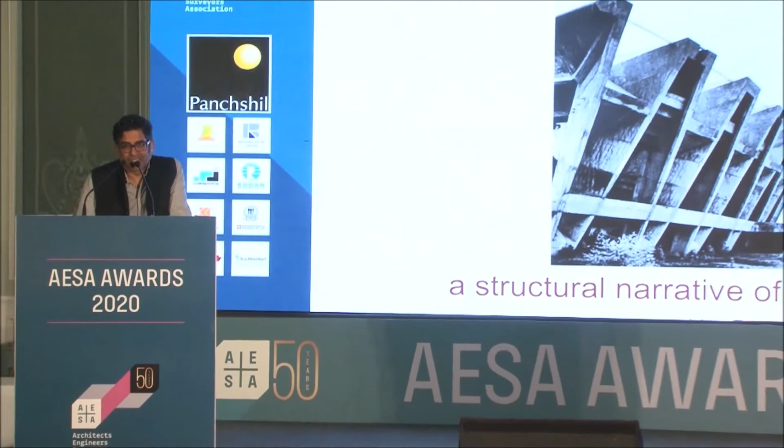And we are focusing on the first 3 decades of his practice, the 60s, the 70s, and the 80s, when there was a lot of innovation in India in architecture and engineering, where the history of the script of modernity for Indian architecture was written. And it was written by my father, Mahendra Raj, along with all the architects. They all worked together and created a portfolio of works which I think should be the envy of the world, but it's not there right now. And that's why we choose to show this again and again.

We'll discuss only a few of his projects out of the 250 to choose from, because they all exemplify the idea of structure and the way it enhances, implicates architecture in ways that it could not have if the engineer in focus would not have been there.

And the underlying narrative for us is this transnational exposure that they all went through. Mr. Raj, Correa, Doshi, Kanvinde, Raje, and the fact remains that they came back to India at a very fertile moment, filled with opportunities that created this abundance that we have, and it's for us to safeguard it because it is disappearing very quickly. With that, I start.

We call the presentation the structural narrative of Indian modernity, and it inflects and contributes and helps create many artifacts, Mr. Raj's works, that create a narrative of Indian architecture, modernism, post-independence.

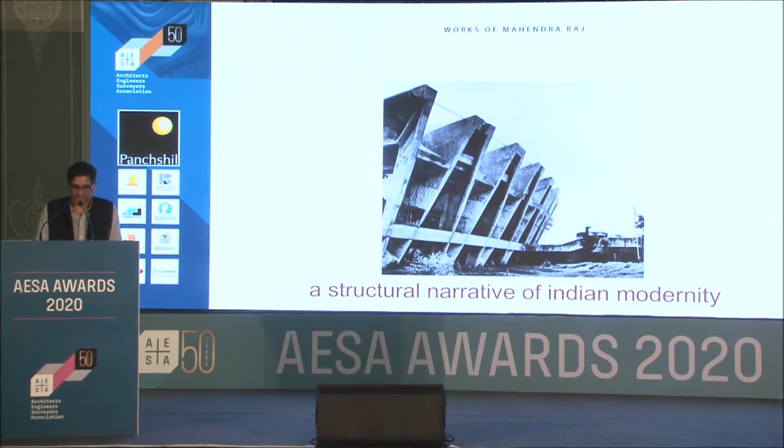I start with his years of apprenticeship, where he started in Chandigarh. He joined the PWD in 1946 as a young engineer and then chose Simla post-partition. And he was in, I think, one of the last few trains which left Lahore without being attacked. So he was very lucky with that, and he was responsible for the Indo-Tibet Road, and then he was the first engineer positioned in Chandigarh, and what he was actually doing was collecting raw material for the new site that was being developed.

So once Corbusier was selected, the government chose an international architect but was very confident about the engineers of India. Bhakra Nangal Dam had already been done by then or was being constructed. And Corbusier, despite his wish for French engineers, was not given the French engineers. He was handed over a team of Indian engineers who actually had no experience in structural design.

So when my father took up his first building as a junior engineer, he was assistant engineer to Gulzar Singh, and he had not even designed a tie or a beam at that point. So this was his first project, and Gulzar Singh, who had gone to America and come back, gave him a lot of books. He had the structural codes from America, and they designed this building together.

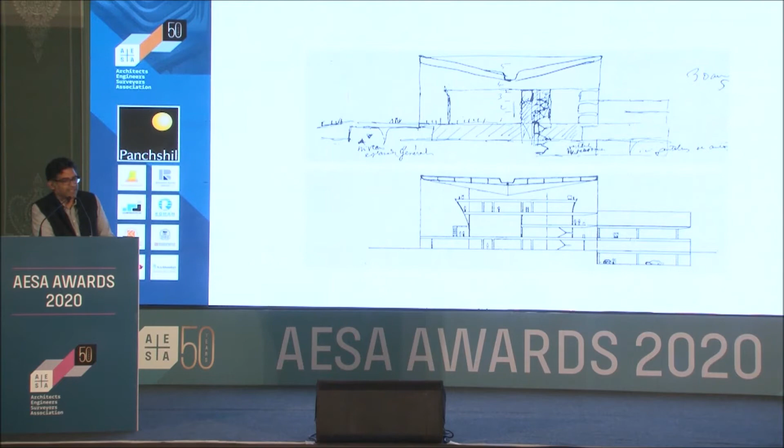He keeps talking about how this experience with these buildings brought him very close to the idea of structural engineering. He took to it like a fish takes to water. And in this building, this was Corbusier's sketch with the canopy, the parasol, and this is what came up as a supported cantilever tie, conoidal shell roof with columns in the middle to support it. So there were already shifts happening from what the architect was giving to what they were proposing as a team to the master architect, Corbusier.

And these are some of the images of Chandigarh. And then he became the executive engineer, the engineer in charge of the secretariat.

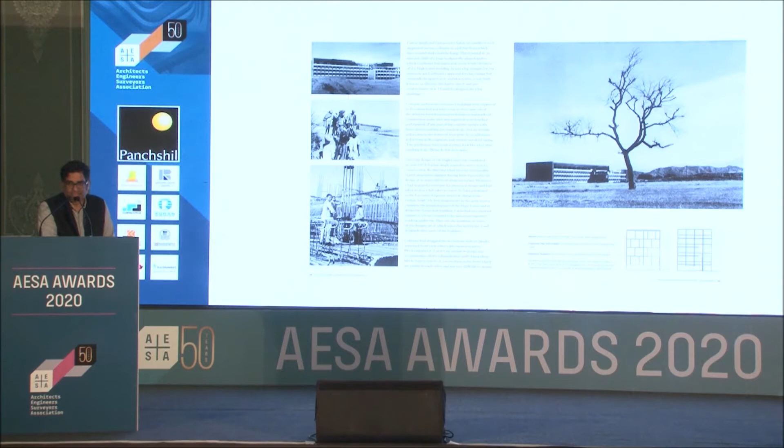And Mr. Raj went back to him to say that this is not possible. And he had a sketch with him. He had worked enough at Corbusier by then to know that he had to give him options, and he had a sketch of what may work. And Corbusier got extremely angry with him, but snatched the sketch from him, went back to the office. Two days later, came back saying that I agree with you, and he sort of modified the elevation to the needs of the engineer, which is there.

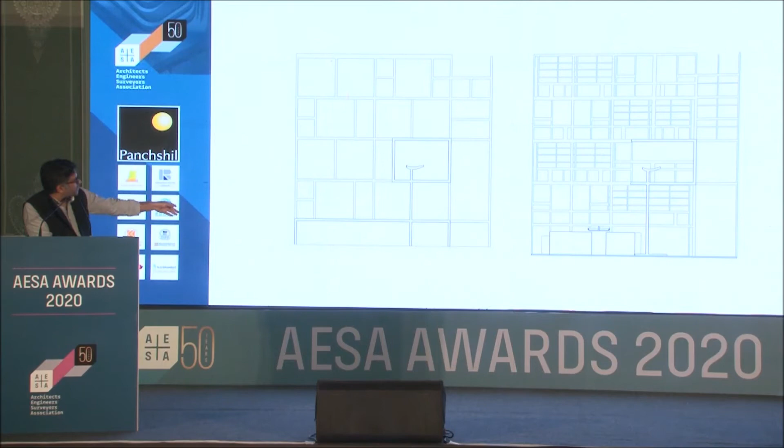So this is the final, where I'm talking about the bay in the middle, where the whole facade gets broken. So these were the experiences he had. There is no pointer, no? This was the original facade by Corbusier, which did not have any verticals going down, and that's what came up finally.

Post that, he went to New York. He sort of decided this was his future, engineering. He went and studied in Minnesota and did a higher degree in Columbia and started working for this firm, Ammann and Whitney in New York. This firm was one of the leading firms in engineering at that time, and they were sort of breaking all grounds there. It's interesting.

He joined the special structures division in Ammann and Whitney, an international space of eager young minds. And this is where we believe he understood the idea of structure not as giving solution to the architect, but structure as an art form itself.

Our real job was to tame the structure, allow it to move within its limits without affecting its serviceability in the process. It was in this nurturing and challenging environment that Raj blossomed, where all his peers as well as the peers in the firm appreciated his engineering skills and people skills.

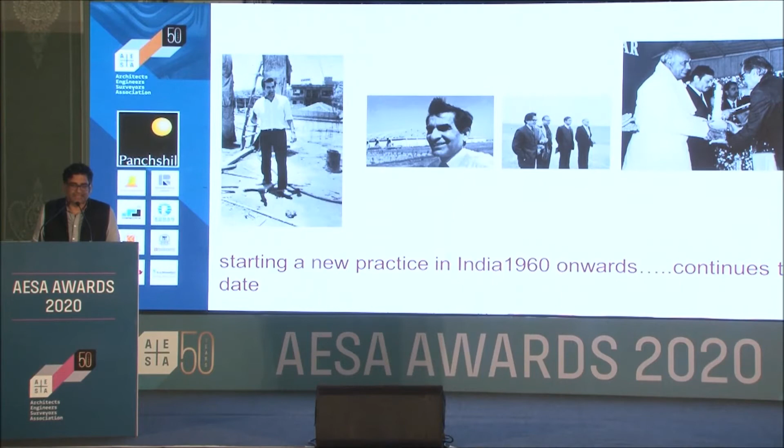He came back on a project from there, and this is interesting because we are going to talk about Correa also. Correa, while he was on Pragati Maidan for the agricultural pavilion in Delhi that Yamasaki was doing, sought him out on the site and said, I've heard about you, you must come back to India. I'm coming back to India, we all must be back to practice here. And Correa didn't know him at all. He sought him out, and that was the first time they met, and that was the beginning of a deep friendship they shared through their life.

And what is amazing is the way he constantly stuck his neck out. Correa also mentioned that many times, empowering architects of this country to create structurally expressive forms through decades of practice, despite technological and material limitations. And this is again important, the limitations created inventive use of concrete. Low levels of mechanization and cheaper construction allowed experiments that he exploited to create artifacts that are uniquely indigenous, in a way Indian, but also remarkably global in nature.

The result, as Mark Jarzombek states - he's a historian of architecture from MIT - is that Raj's astonishing contribution to the world of architectural history in India has no real parallel anywhere in the world.

So today's presentation, we are splitting into two categories. I will take the first part, where we speak about the large span structures he created, which were really more structural buildings, structured with the proportioning that came from architecture. Then we talk about architectural buildings where, through his innovations, he imagined new spaces within that, which Vandini will be talking about.

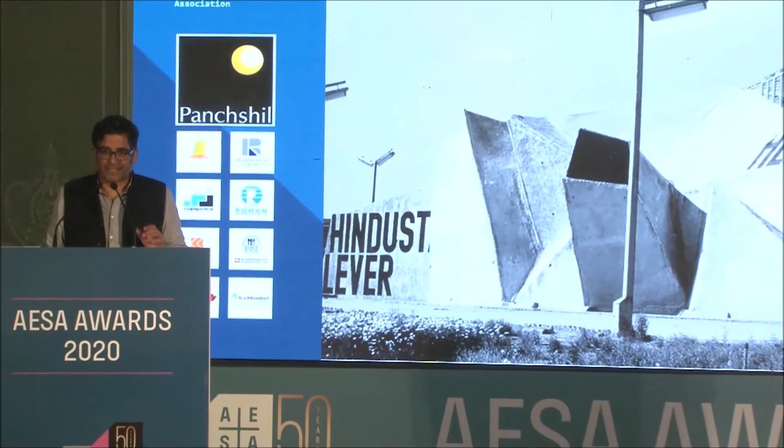The first project was the building without plans - the Hindustan Lever Pavilion with Charles Correa. Correa came to the office and threw a crumpled paper on Mr. Raj's desk and said, 'I want a building like this.' So Raj said, 'Well, we can't give you a building like this, but if you follow my rules, then we can create a building which is close.' He gave the shape of the triangles he could use and the idea of these triangular plates coming together.

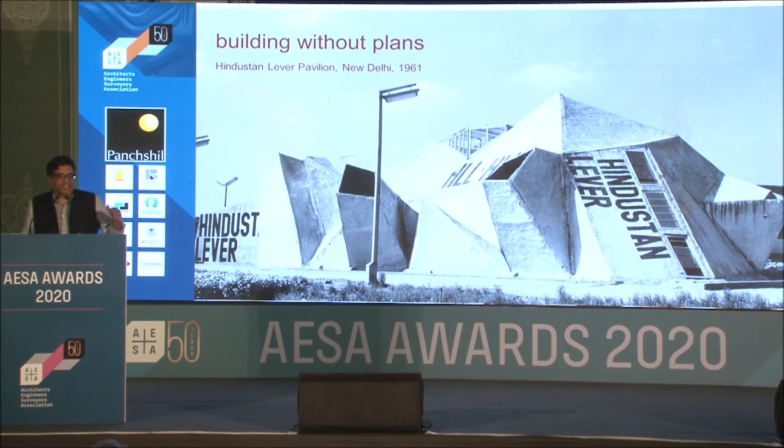And this building was built - it was a temporary structure. What is interesting is that there were no drawings. Correa made a model and sent it to the office, based on which structural drawings were done, which you can see here.

This was the beginning of what Mr. Raj's practice was about - these construction notes that he left on every drawing for the contractor, which were highly detailed notes telling them how to build the building. Between the model and these drawings, this whole building was constructed.

So it's actually a very beautiful story from the 60s. During this time, in '64, he also did the municipal stadium of Ahmedabad with Correa, who came very excitedly to Mr. Raj saying the municipal commissioner had given him this project, but asked them to do only one bay of the stadium - for which he was giving 50,000 rupees, a lot of money at that time. Correa said, 'I'll keep 25, you keep 25, let's build this building together.' They both agreed because for people just starting out, it was a huge opportunity.

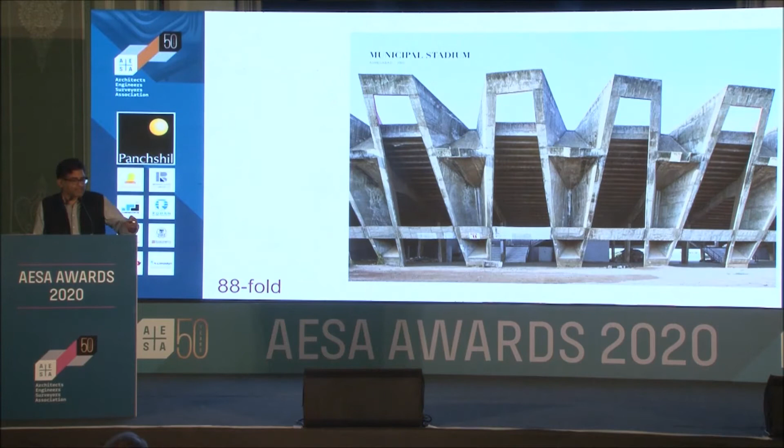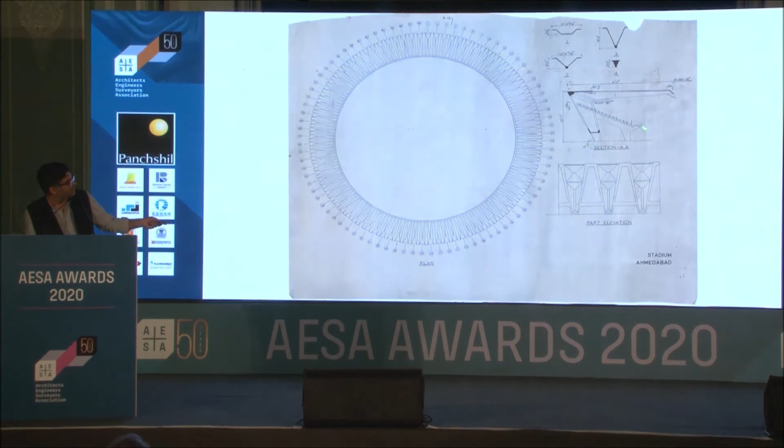This is the first place he tried his folded plate experience in India - a cantilevered folded plate with a 20-meter span. It's a tapered folded plate which comes down with plate thicknesses of 10 to 15 centimeters, and it's also tied to the seating here. The whole form is extremely centered, and this angle allows the center of gravity to flow down, creating very slim sections with also extremely aesthetic foundations.

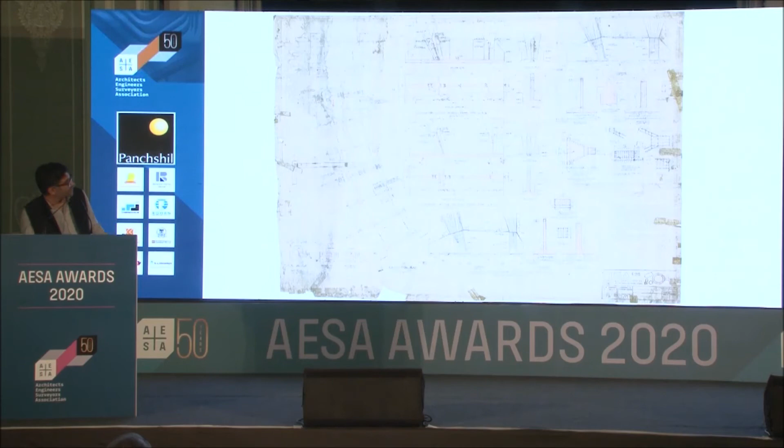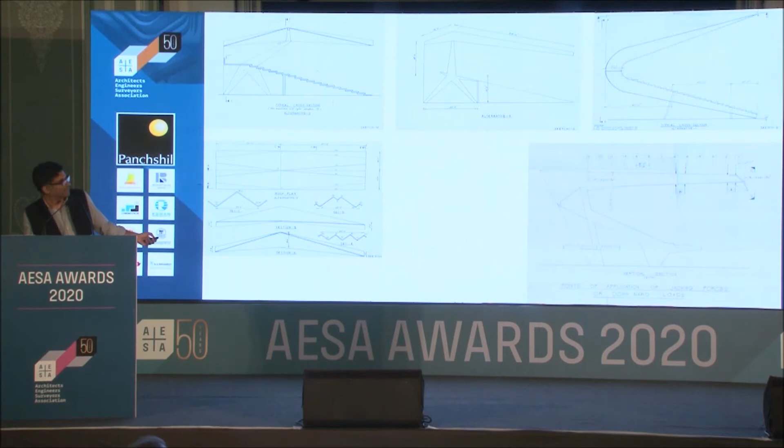This is the foundation drawing, which shows how beautifully everything was managed and minimized, because it was also a time when they wanted to minimize the use of material. The way Mr. Raj practiced - I'll go back and forth in this - is that he came up with lots of options, many options, and finally the last one there was chosen.

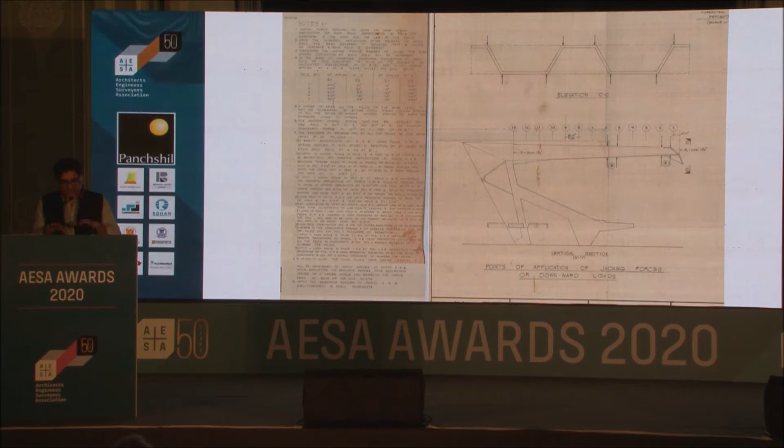These were, again, the construction notes written for the pouring of the concrete. When the concrete was poured, they had to, at some places, lift it, and at other places, load it down for the roof to settle into one line, and then the edge diaphragm was connected to it. These were the notes written as part of the drawings.

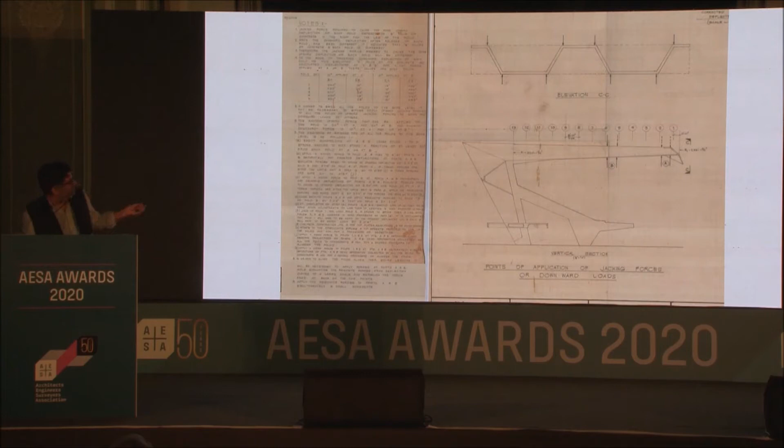At this time, he was also working with Doshi on Tagore Hall. This was another folded plate experiment where he developed a roof-wall system. Inside was the theater, which had its own independent structure with these Nervi-like columns.

This itself has an interesting story - Doshi wasn't happy with any of the columns, the way they were coming down. Raj, who was very influenced by Nervi, wanted to try out how to let the stresses move from the beam to the floor with a logical flow. He twisted the columns this way, aligning from the beam down to the floor below, and that's how this whole form emerged, changing the space.

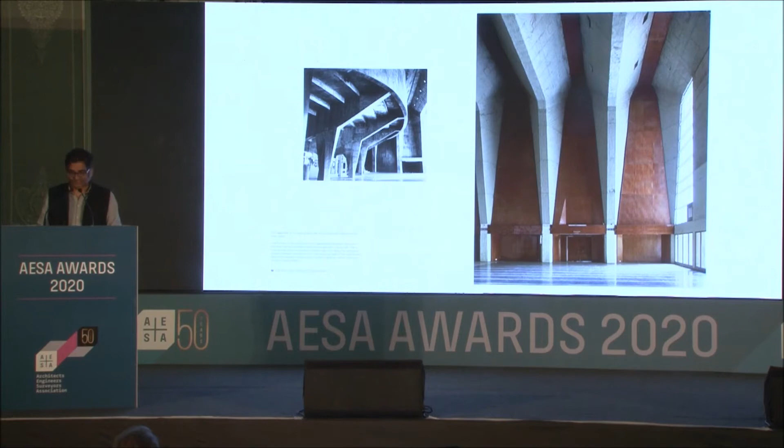This was set inside a 33-meter span building, a volumetric building which was a folded plate portal. What is interesting is the way these folds come down and become slender. At this point, the roof and the wall have the same dimension, and then it slims down and expands onto the other side.

This is the seating and the column here. This is the reinforcement diagram of the folds from the outside.

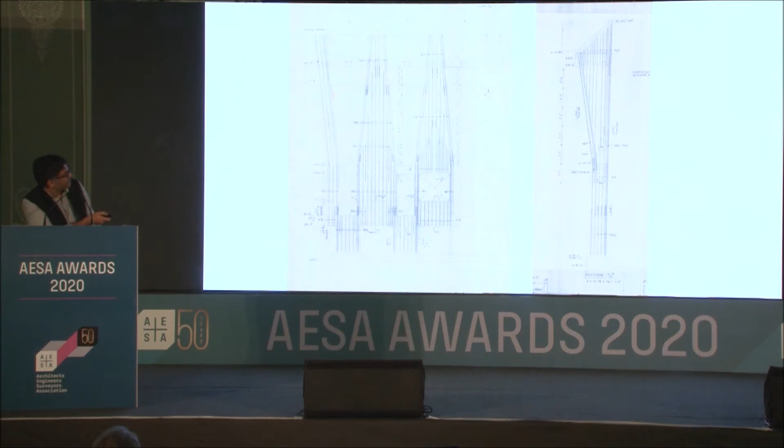These were the different options that he created for Doshi to choose from. These were 6, and then there were more.

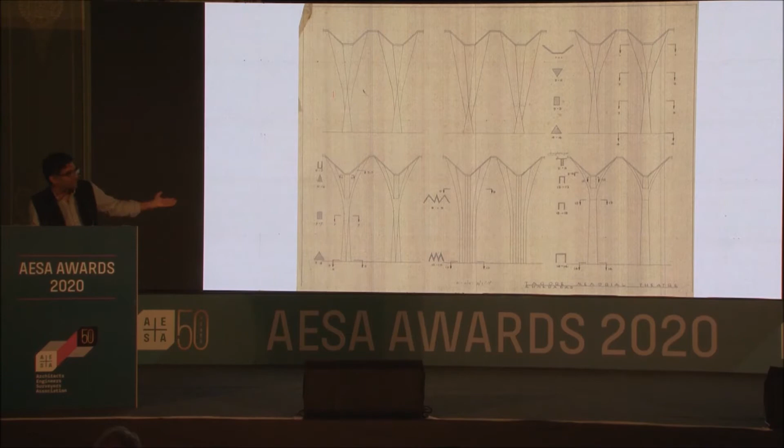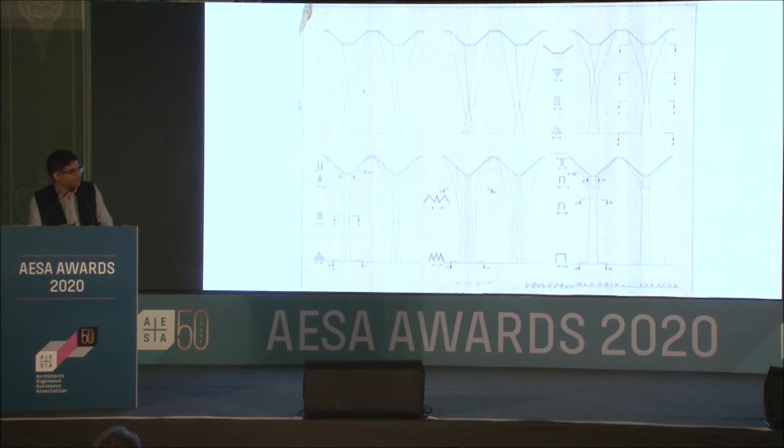They're not here, but what is interesting is we just recently did a retrospective of his work at Kiran Nadar, and we created models of all these options. We saw his own thought process, how he started with a certain folded wall and roof structure, which became integrated, and finally led to the final form: integrated folds that came from the roof onto the wall.

These are some shots of construction there. Today, in time, it is still there as a presence. Hall of Nations, he came back to Delhi in the 70s, and this is where

his practice really picked up in terms of these extremely structurally expressive buildings. Hall of Nations was one of them, which was an 84-meter by 84-meter large span structure, the first of its kind in the world, cast in concrete, an in-situ space frame structure.

There were a lot of engineers when we were trying to save the Hall of Nations. This building is now demolished, and there were a few people who criticized the structure, especially from the engineering side. They said a space frame should be in metal. Why was it in concrete?

That's again when we realized the need for people to get more educated on these works, because steel in the 70s was extremely expensive. It was first designed in steel, then in precast concrete, then in cast in situ, because steel was too expensive for the government to afford, and the contractor gave up on precast concrete. So it was finally done in cast in situ concrete. This was all done in 2 years' time, and drawings for all 3 alternatives were made. That shows the rigor and discipline of practice that took every idea to its logical end.

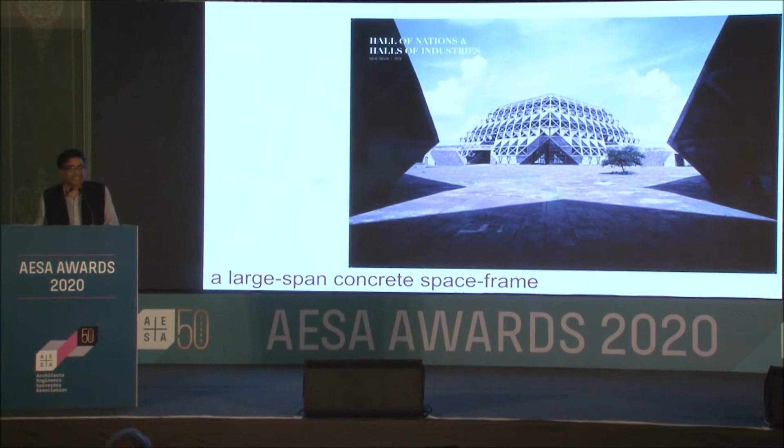This building is actually a very simple building. It starts with 3 inverted pyramids below, which then replicate, and they create this entire structure spanning 84 meters by 84 meters from one outer edge to the other.

This is the plan, and this is the diagram which gives the entire information for this construction, from the 3 pyramids below, and how it develops into 4, and then 5, and it goes on like that.

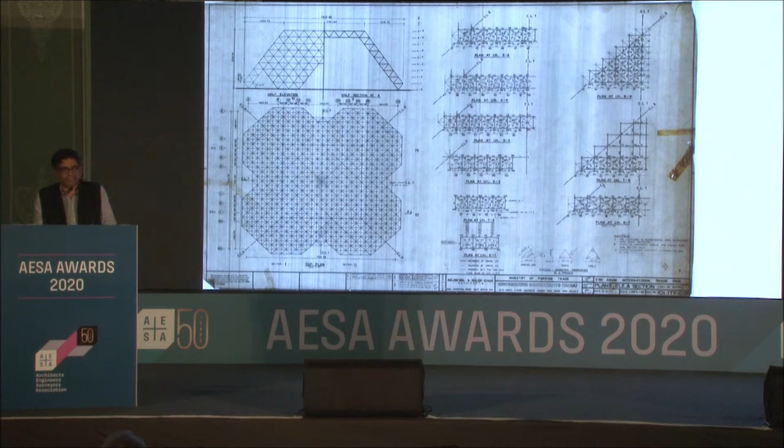It creates this whole space frame, which rises up to almost 38 meters. And these are the drawings which show the steel, the precast, and the cast-in-situ concrete versions.

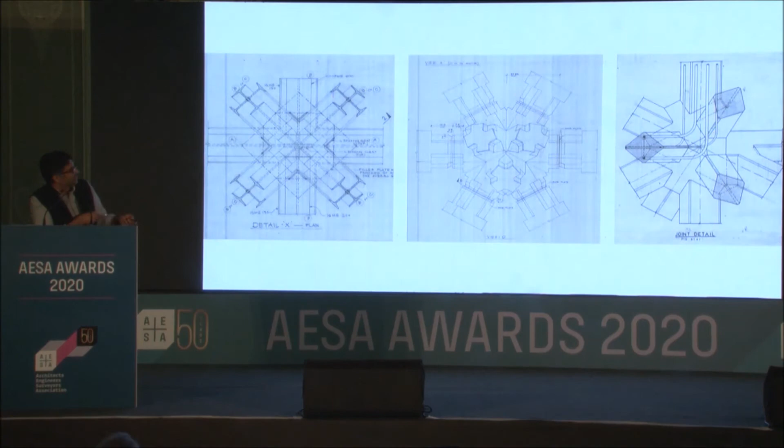This was also where he innovated this joint in form and geometry, what we call the robust rhombus. The delicacy of the structure comes from this rhomboidal geometry, which allows the edges to be perceived by people, and really gives the feel of the building, and the delicacy that came from this joint.

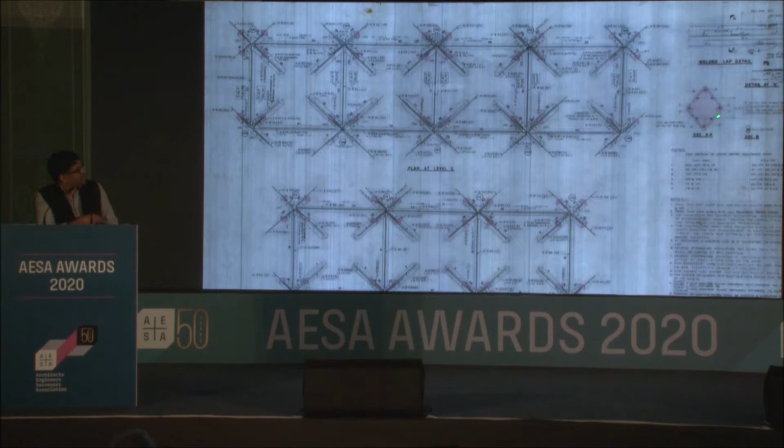This was all 25 meters by 25 meters. And again, for the show, we created models of this. Unfortunately, we don't have those images today, but we created reinforcement models of this.

At first, even our in-house engineers said, no, this is three-dimensional, you couldn't have such a complex building in rhomboidal shape—they must have been square, and he's showing it in three dimensions. They insisted on doing a square model of the reinforcement, which looked extremely bulky. We had to insist, no, it is a rhomboidal shape. The moment it became a rhomboid, the whole aesthetic changed.

It became so light and beautiful that, for us, it was actual proof of the genius of intuition and suggestions by the engineer who created the building—it has no parallel in the world even today.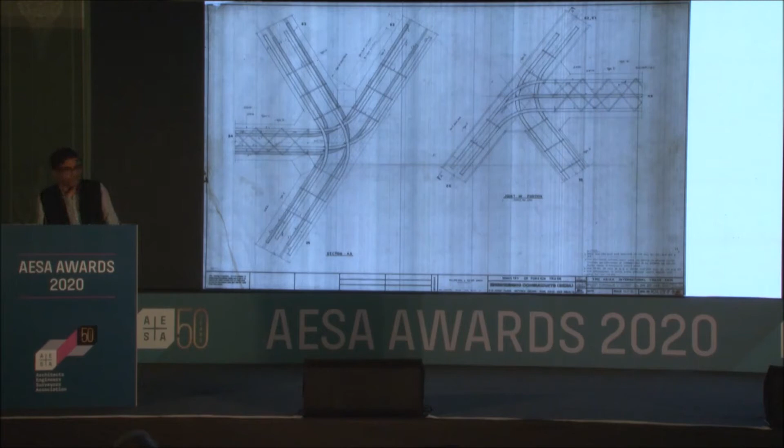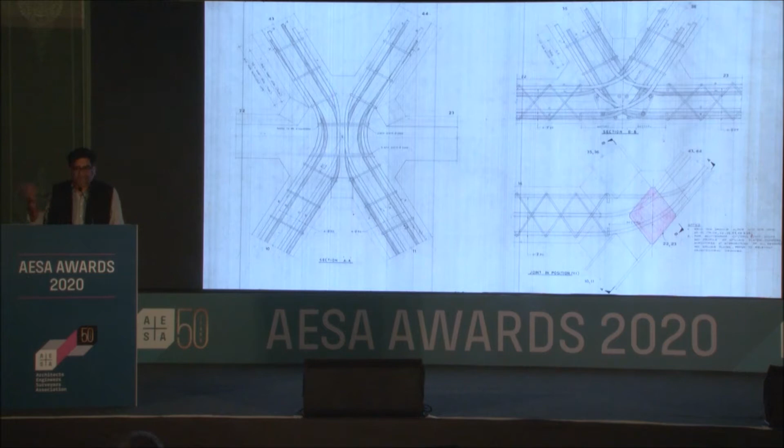These were some of the drawings of the reinforcement of the joints. There were 13-member joints, 11-member joints, 9-member joints, 7-member joints, and each one was a highly complex joint, which took a lot of time, even today, for us to figure out. This was done in the 70s, on site, in a 2-year period.

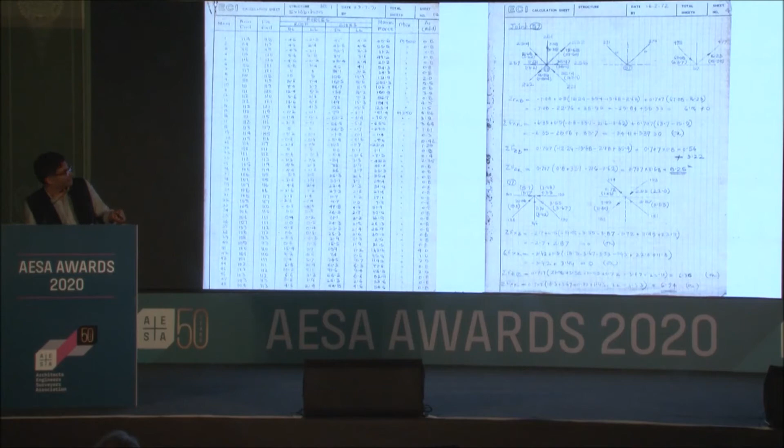These are some of the images of construction and some of the calculation sheets. And again, another thing is all these buildings were done before computers came in—they used manual calculators at that point in time.

Another important part of his practice, as we started speaking about in Ahmedabad, was that every building was detailed in terms of constructional logic. For the Hall of Nations, he analyzed all the stages of construction as separate structures, to understand when and how the scaffolding could be reduced, because it was important to remove scaffolding as fast as possible to minimize use of material. He devised 5 stages of construction, but when the building came up, it was not built exactly as envisaged. The contractor had gone up in one point and was less in the other, so they had to reanalyze the whole form again to see whether they could remove the scaffolding and the building would stand on its own. It did, and they continued further.

These are some of the notes. And this is the building from the outside, and from the inside. The magic of the building is really these rhomboidal forms, which create this extremely delicate looking surface, almost like a filigree.

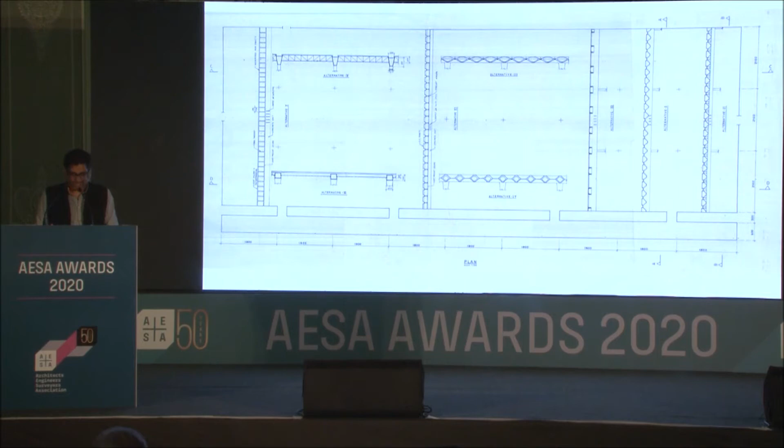Then the client changed the brief on him, saying they wanted to double the space up, and they didn't want 24 meters anymore, but almost 48 meters. That's when Mr. Raj proposed that instead of putting a column in the middle, like he did here, they span the entire 48 meters with a twin arch structure. The client wanted to make sure it's not more expensive, so he created this whole analysis with moment diagrams, which shows how the structure is actually more economical, not much more expensive, and also uses less steel.

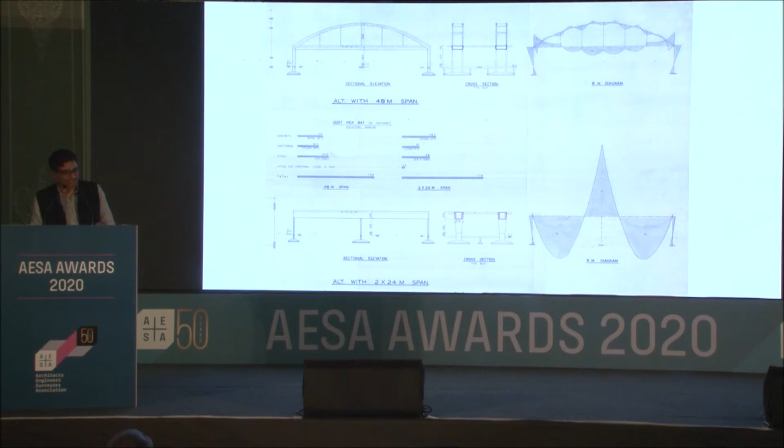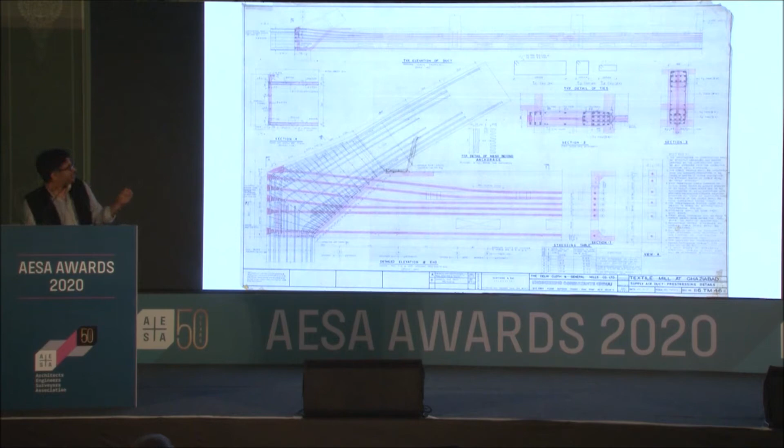So this was the structure: twin arches spanning 48 meters at every 15 meters, to create this space inside. These were tied, post-tensioned on the edges, and the tie beam became the duct. This is the drawing of the post-tensioning and the arch. Again, there were detailed notes on how the construction had to take place, and these are some shots of the construction.

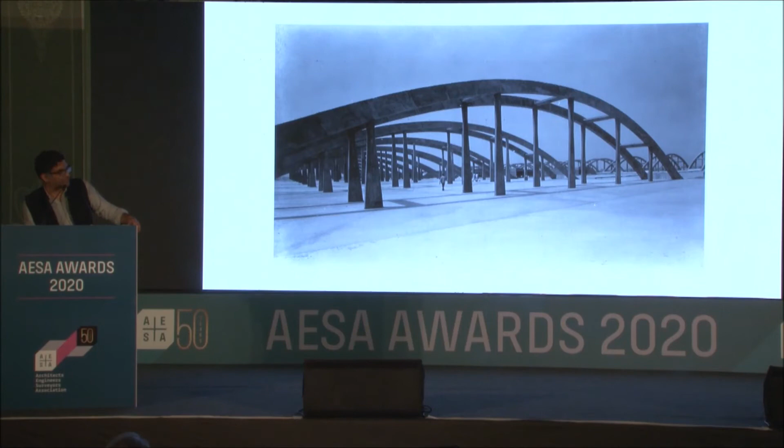From there we come to his Srinagar Sports Stadium, which was built in the 80s, which took a step further from the Hall of Nations. It's in a very similar aesthetic, but actually uses triangulated plates and not a space frame structure.

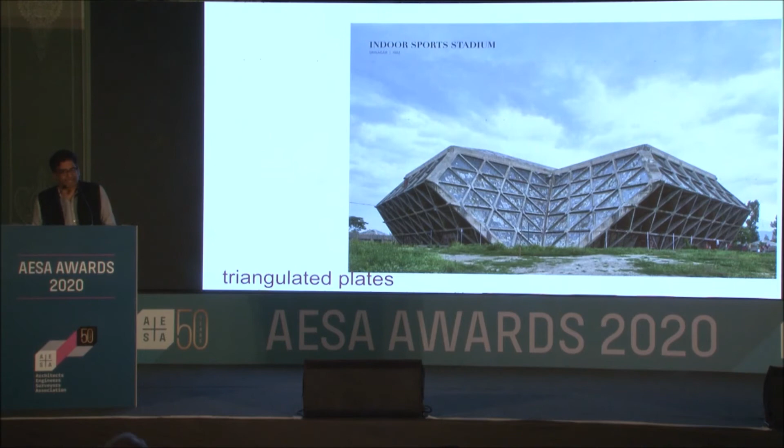This was done by Kanvinde Rai Chaudhary, and Mr. Raj always says it was a lot of fun for him to work with Kanvinde because there was genuine respect. Mr. Kanvinde was one of the most humble architects, who would accept everything that an engineer or anyone else would give him, as long as it was in the interest of the building.

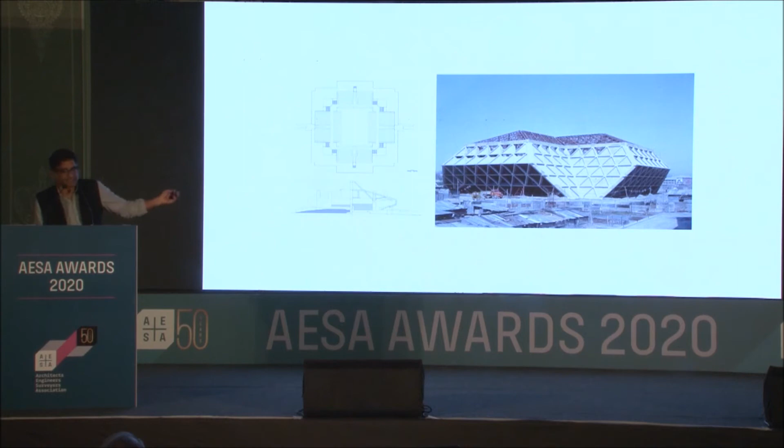This was the original plan, which had pylons in the middle, in a cross-shaped plan. Keeping the intent of the cross-shaped plan, Mr. Raj suggested a totally different aesthetic of triangular plates, with a set of seven plates on each side, which created this cross-shaped plan but also gave a clean span of 74 meters inside. Mr. Kanvinde accepted it, but it was a radically different aesthetic that emerged.

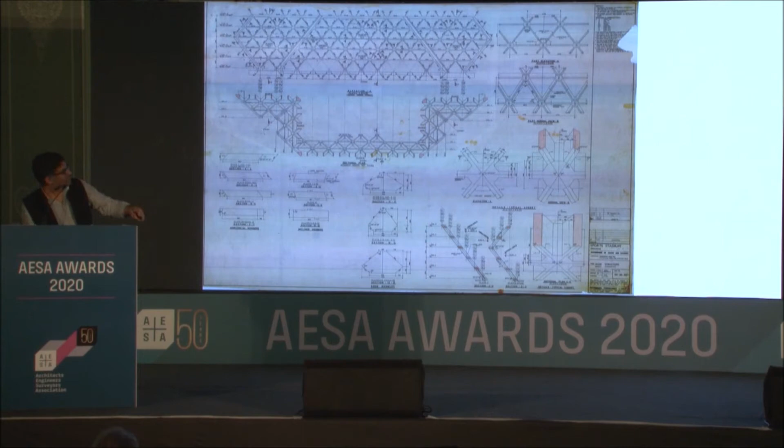And this was the foundation plan, where again we love showing this foundation plan because it shows that at every level was the aesthetic of the structure, the art of structure, where the aesthetic of the foundation is also beyond the geometry, the triangulation, the slimness, and this is all under the ground, no one can see it, but the rigor of dematerializing structure was so intense that it went right from below the ground to the roof.

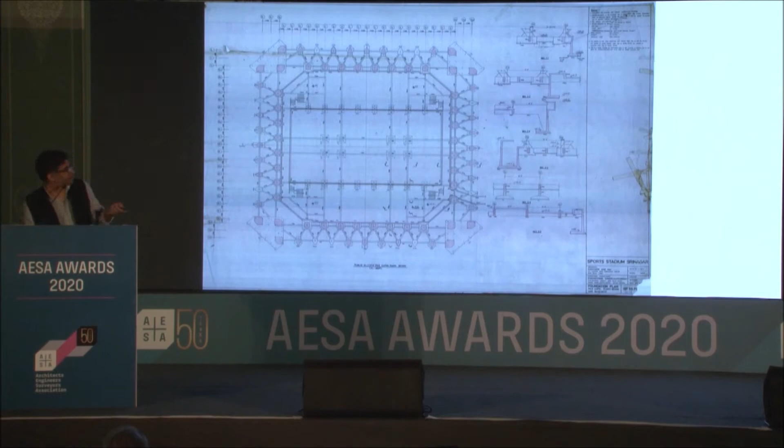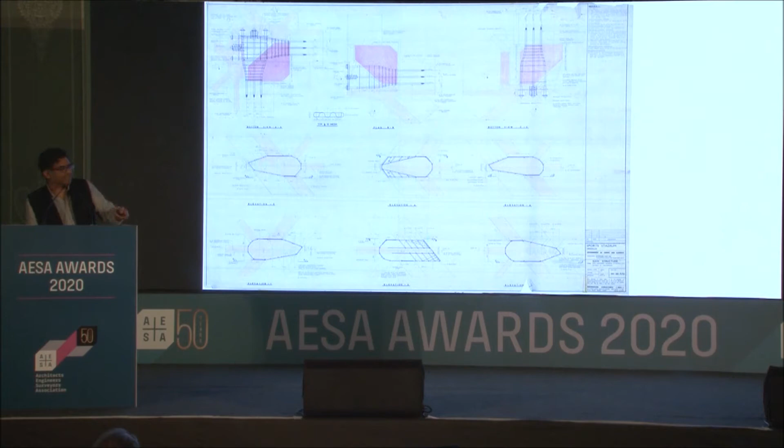This was the seating which was integrated to the folds. And these were the organic shaped forms that emerged because they were post-tension sort of horizontal members that were holding these plates together, and where they came on the diagonal, these forms were created. And this again was intensely worked between the model maker in Kanvinde's office and Mr. Raj. They used to work, and then these drawings were done in the office based on the models done in Kanvinde's. Those are the post-tensioned forms which were shown earlier along the 4 edges of the building.

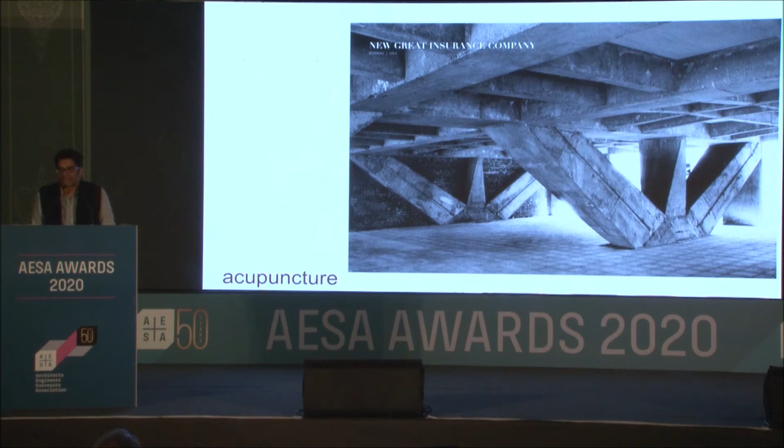I'll continue by showing buildings of Mr. Raj which were not so overtly about the structural gymnastics or very large spans, or where he had the primary say as a structural consultant, but more buildings with innovations and inventiveness to bring out the demands and the desires of the architects. Solutions that help realize and even enhance the imaginations of what the architects were suggesting. In these buildings, the design of the structural system and elements, as also of the processes and techniques of construction, give a new dimension and spans of spatial possibilities, whether it be through cleaning up dozens of columns, creating clear open spaces, or lifting off the spaces by transferring loads elsewhere, or just even tapering and shaping the elements.

So I'm going to run through that. I think we don't have that much time left, but this is one of his first projects when he came back to Bombay and started his practice in the 60s, the New Great Insurance Building. The demand of the client was to build a 6-story office building on top of a 3-story garage. So this is the existing building below that you see, on top of which the construction goes up.

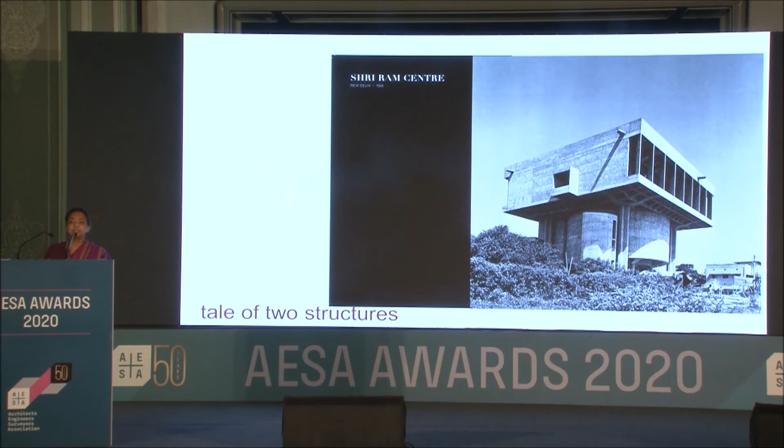So here again, this is the Shri Ram Centre, which was also done in the early 60s. It's the Shri Ram Centre of Art and Culture in Delhi. Here, architect Shivnath Prasad, we all know about his love for Corbusier's work and what a great follower of his style he was. But despite a very clear architectural language, in this building Mr. Raj was able to suggest very dramatic structural solutions which enhanced the building further.

So like we see here, one of the most interesting effects of this building is this drum-like base above which this parasol kind of structure almost seems floating. And that is coming from a structural separation of these two volumes, which was not part of the original design, but because of the way it was designed as a drum shape below. And this 31 meters by 31 meter parasol structure was lifted up on just 4 columns, as you may see, these cross-shaped columns holding up this parasol structure.

So these are the cross-shaped columns, and they take the weight of the parasol form above. Again, the details of these elements really matter, the way every element and form is tapered to the absolute precise requirement of that structural element. So that's the drum below and the parasol above.

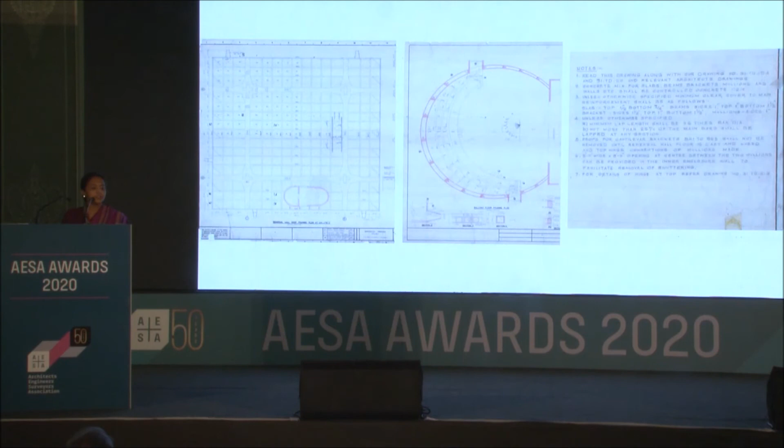And as Rohit mentioned, the notes in his drawings are really the key. One of the things we really learned over the last decade that we've been studying his work, and we came up with his book and several presentations and exhibitions, is that every time we learn more, because as much as we stared at those drawings and calculation sheets and notes that he created, it's amazing how much information was imparted through those notes. Every detail and precision was really part of them, very concisely.

They were elaborate and a very large number of drawings. The joke between Mr. Raj and his wife was that for every drawing an architect makes, Mr. Raj would make 10. So each project had a huge volume of drawings, which were really beautifully composed. There were no blank spaces; they were handmade drawings. Despite the effort of remaking drawings, they were very precisely composed. And the notes were just loaded with information for the design, for the contractor to build, etc.

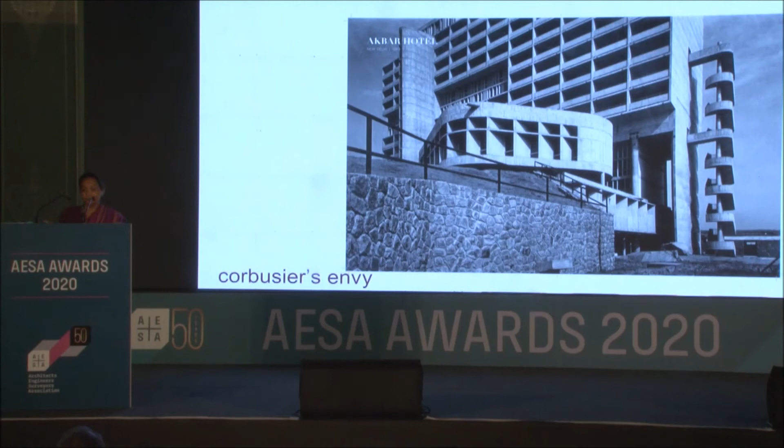So then in 1969, this is the Akbar Hotel, the main hotel block, also a Shivnath Prasad building. In his original drawings, when he came to Mr. Raj, the main entry foyer was full of columns, because the requirements of hotels required columns through the building. But Mr. Raj was not happy with the foyer being full of columns, so he said, we're going to get rid of all of them, which he did. We believe, and this could be wrong, that this was the first time a foyer in a hotel was cleaned out and made without any columns.

He created this transitional floor just above the foyer, a full floor that takes the services, but he also uses it as a transfer floor for all the columns above, into transfer columns and girders that freed up the lobby space. As you can see in the section, the 9-story hotel building above uses all the columns, then it comes to these 2 transitional floors, and then the 2 floors of the lobby and the public spaces.

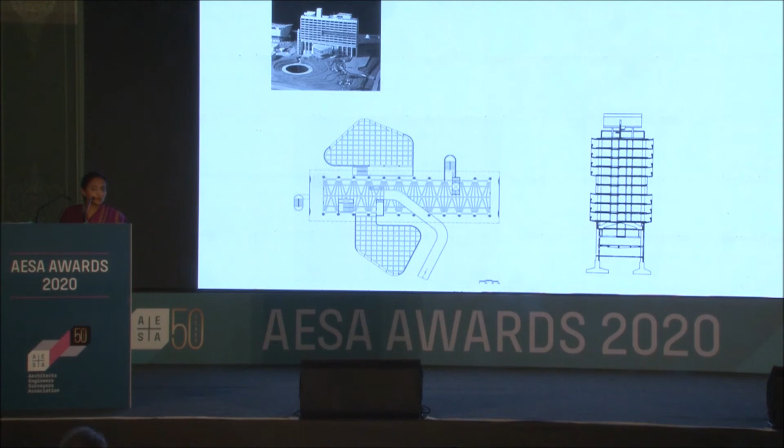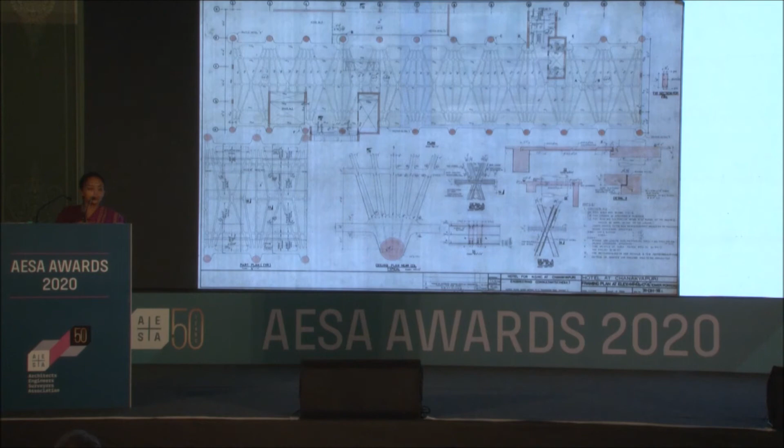That was not it. After opening up these floors, Shivnath Prasad had a very clear idea that he wanted the foyer to have just a slender beam. The building is coming down 9 floors high, so how are we going to make this slender beam? Mr. Raj suggested this webbed rib structure for the slab of the foyer, which actually became like an ornament for the foyer itself, because he webbed the ribs so that they became deeper in the center and slimmer at the edges, so the beam on the periphery was the dimension that Mr. Shivnath Prasad required. He pulled out the columns, which was part of the architectural statement, but then he collected the web around the columns, as you can see.

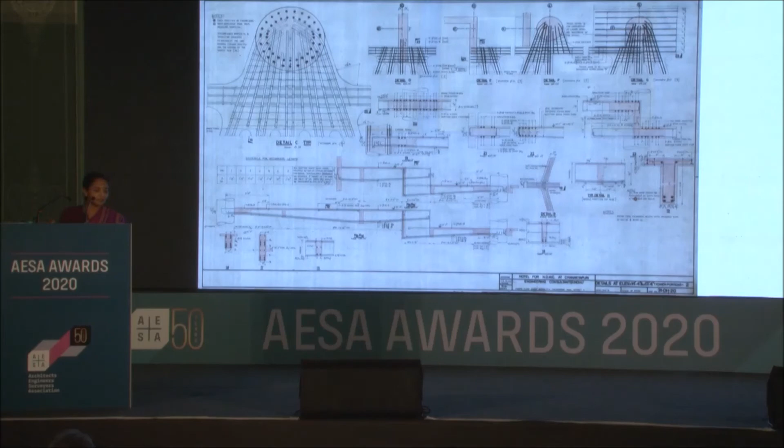This drawing, I always have to stare at it for a while, because it feels like the reinforcement is talking to you and it's dancing. You can see in the column and beam section how it's ribbed and how the center is deeper, and as it goes to the column, it becomes so slender that the peripheral beam became the dimension he required, which I think was just about a foot high. Am I right? And this is the transfer girder that was in the transitional floor.

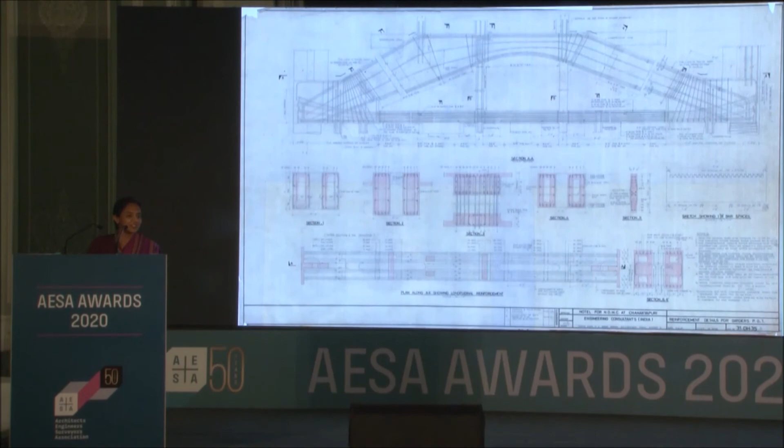And of course, as Rohit also mentioned, he uses pre-stressing very extensively as a technique, which in those days I think was not very prevalent. I'm talking to a group of very eminent engineers, so we'd love to have more discussions or questions about this, because I've questioned Mr. Raj on this so many times: was this really unique? He uses pre-stressed concrete so easily and talks about it with so much ease, saying it happens all the time. I said, really? In the 60s, was it so common, when concrete and steel were barely available and you had to collect the material before you even started construction? So this is still a mystery. I don't know whether it's his humility or just his ease of imagining buildings and structures.

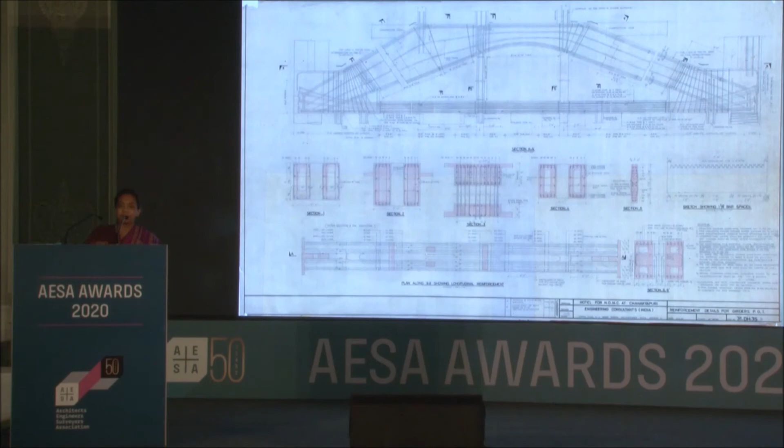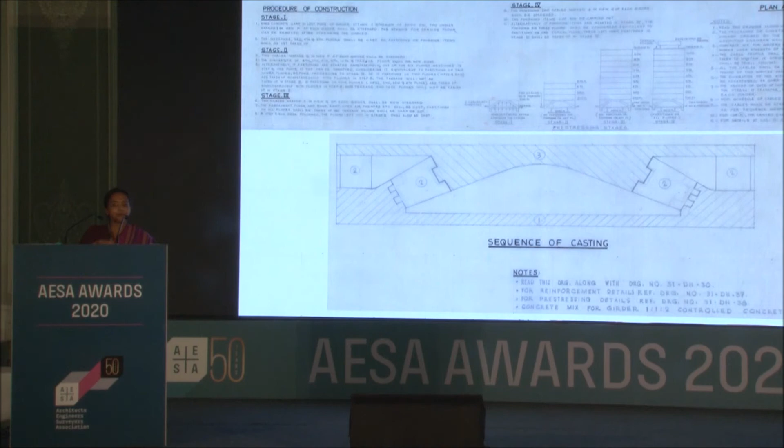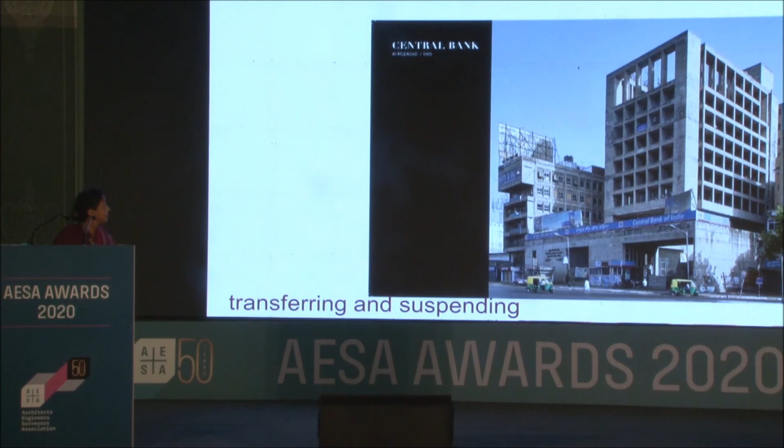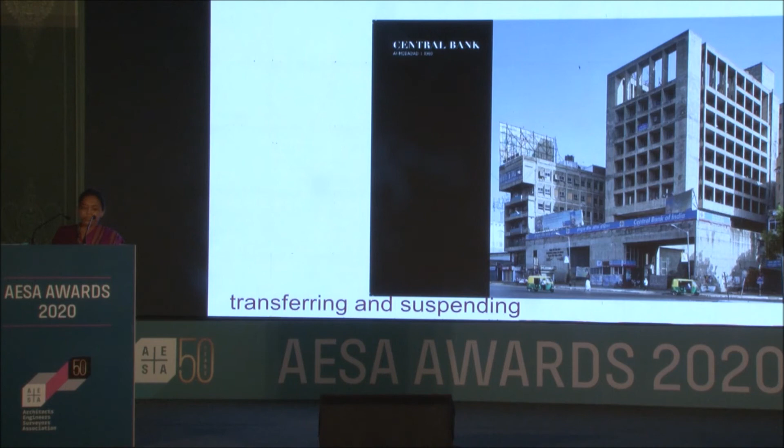This is the central bank done with architect B.V. Doshi. And again, this was a building in the 60s, 69. It's a 6-story office tower again on a podium which is irregular shape. And here he uses these 4-column bays to lift the whole building above the podium level, creating very large openings below. So this is the lifted space, and you create really large openings.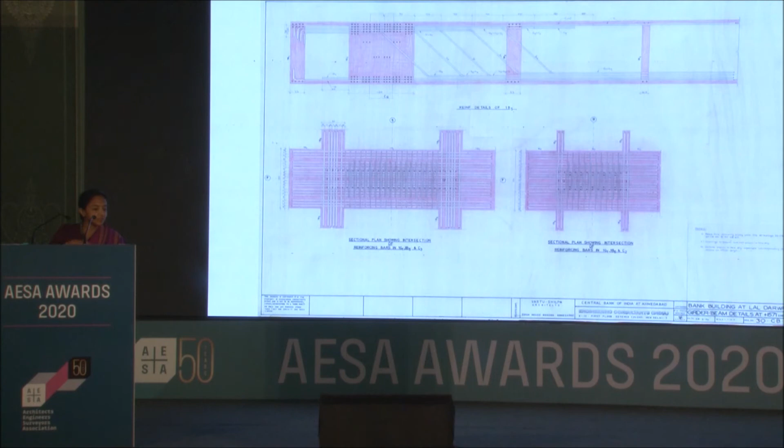And just the corners are 4-column bays, which have 2 large transfer girders across, and the whole building is lifted off them. And these sun breakers are placed on thin transfer grids, which span the columns in 2 directions. So that structural clarity and refinement that he could bring to very clear ideas of the architects is what my part of this presentation is showing. This is the transfer girder and the slab and all the reinforcement and the detailing in that. This is the podium level where he lifted off the whole building, and there was a suspended floor.

This is the Premabhai Hall, also in Ahmedabad with B.V. Doshi. And here, 2 exposed concrete shear walls, which are parallel shear walls, are the main structural system of this building. And then the end, as you can see, is this cantilevered end, which gives it sort of this dinosauric kind of a form.

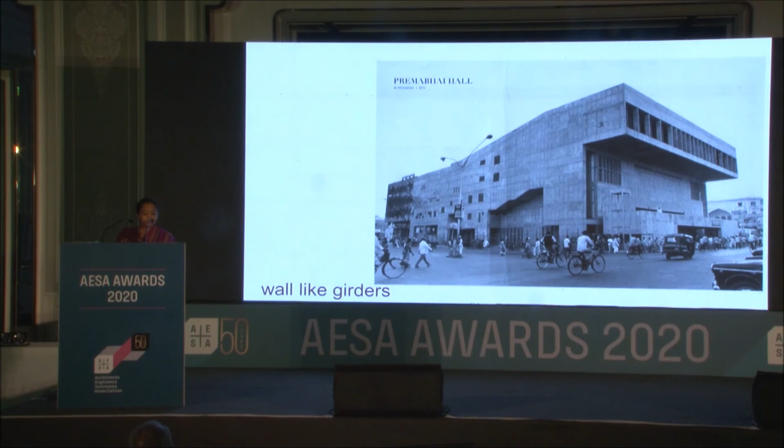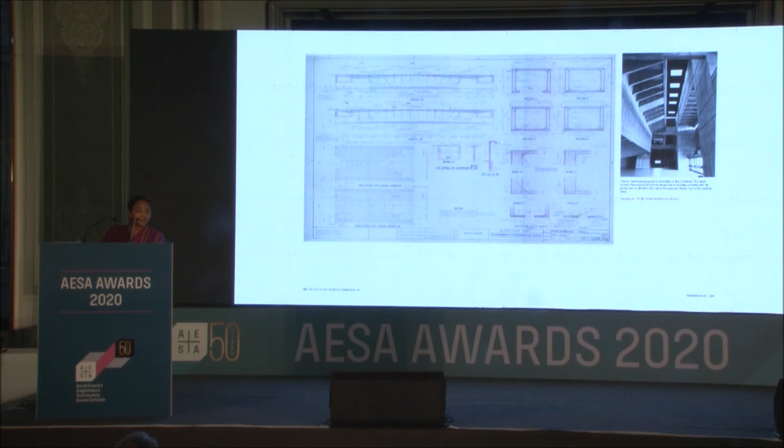This is to mention, he was a structural advisor in this IIM Ahmedabad building. He was not the main structural designer, but he had very important inputs, and we just wanted to bring this out, where brick was used as the main element, and he was not very happy. He was like, this is a small element, you want large spans in this building, so how are we going to use brick, which is not really a structure to make large spans?

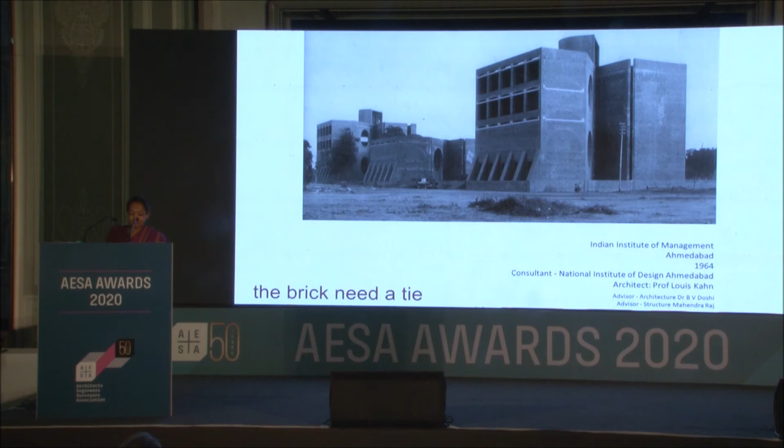So the concrete tie was his recommendation in this form, which we believe lent a great deal to the refinement of these ideas that the architects had very clear visions of. So this concrete tie that you see, which is holding the arch, gives it that stability and an elegance.

This is in the 80s, this is the NCDC building by Kuldeep Singh in Delhi. And here, this was, again, a very clear idea that Kuldeep Singh had of this sort of zigzagging building shape that was ascending up. And it's known in Delhi as the Fata Pajama building, that's what it looks like. And these shifting load transfers, so again, the friendship and the association he had with most of his architect friends was quite amazing. So Kuldeep Singh had done this design, and this was a competition.

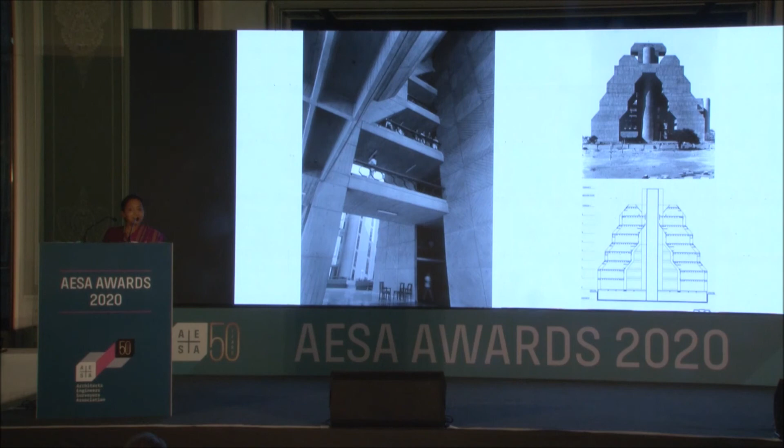And in the jury, when he presented this design, the jurors said this building is not possible because it won't stand. So he's saying, don't worry, Mr. Mahendra Raj is going to be my structural designer. So they said, okay, you call him in. And then, of course, once Mr. Raj could convince them, that's how he won the design, and they built it pretty much how he had designed it. So again, architects could imagine, because of their friendship, things that were not always possible and easy to imagine as forms.

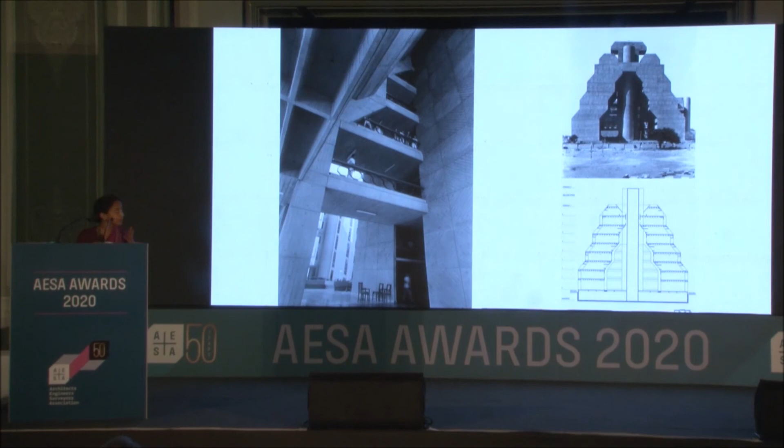And so here again, these 2 shear walls on the side and these meandering columns hold the whole building together through the corridor. So the corridor becomes a very important part of holding this meandering form. And the corridor goes through from one end of the building to the other end, either as a strut or as a tie. So either it's holding in tension or in compression the entire meandering form together, and which becomes a corridor. So it's a functional element as well.

And it's post-tensioned. At the ends, in the center of the building, you can see these little brackets or blocks which have post-tension members in them. I'll just go back and stay for a minute with these calculation sheets that you see on your right-hand side. And so all of these are hand-done calculations.

There are reams of these calculations we have, and now we are beginning to analyze them further, and this is the next stage of the work that we're going to be doing on his archives. Because all of these are also such beautiful art relics. They look so beautiful, and structurally they became the methods by which he could imagine and calculate these very complex structures. And as Rohit showed earlier, he didn't leave any stone unturned.

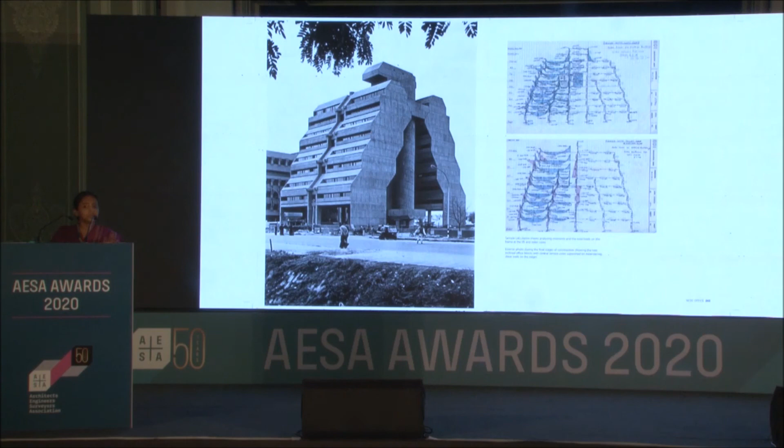So there were various options. So what was the best possibility was imagined and drawn out in these calculations through these diagrams and very detailed mathematical equations for all the different combinations. So he says that unless you do the calculation, you can't imagine what the possibility of that structure is. So each of those different combinations and suggestions and options he came up with, even if they weren't finally used, had detailed calculation sheets attached to them. And these are just so beautiful.

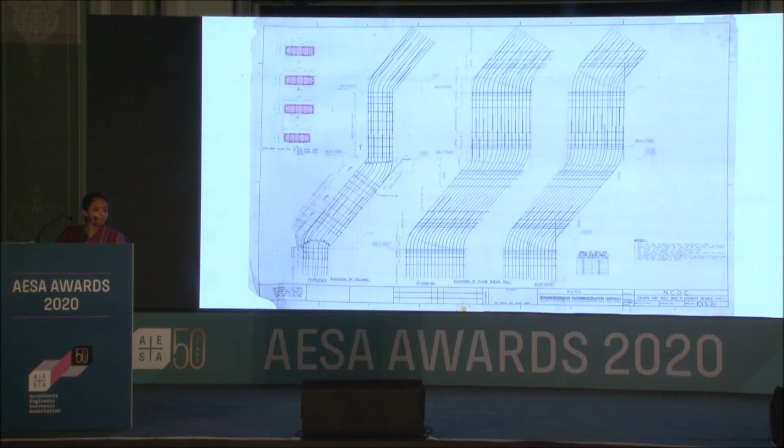I mean, you can see the calculation sheets showing all of the drama of the building, the tensions. You can feel the tension and the forces and moments of the building. So here are, again, stages of construction, an important part of his work, and very simplified and clear for contractors to understand. These are the different floors where it's either a strut or the central corridor which holds the whole building together. And these are the meandering columns and the shear walls.

Then I'll just sort of wrap up with this. I think I've overshot time. How am I doing with time?

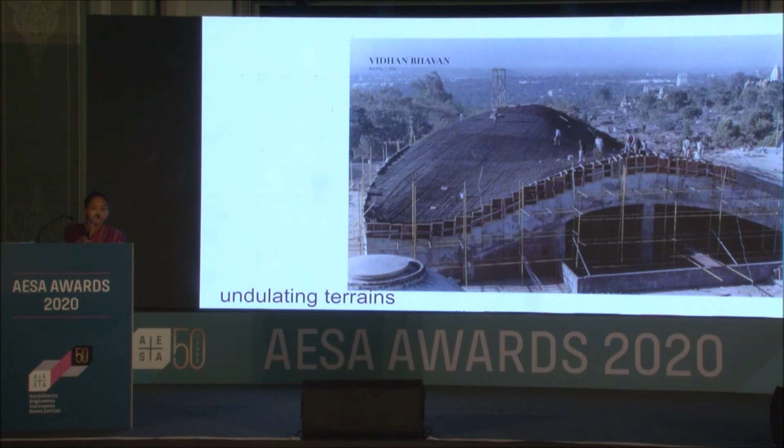Should I skip this? Okay, this is the Vidhan Bhavan with architect Charles Correa. And this is by the 90s. Here already structural geometry was not that important, and it was more about architectural forms and ideologies, where the structure was not such an expressive part. But Mr. Raj doesn't stop exploring, even today, as he's 95, and nor did he in this building.

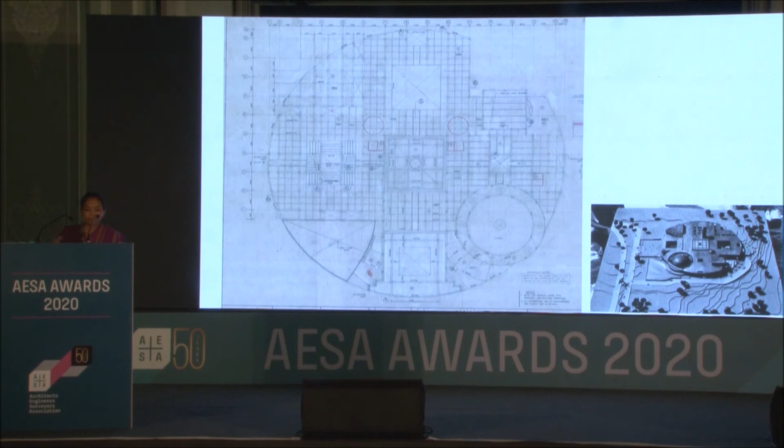As we all know, these forms don't stand out at us, but this is the multi-purpose hall, which is a doubly curved shell roof, 43 meters by 43 meters. This is the 31-meter diameter main Vidhan Sabha hall, which is a concrete hemispherical dome, whose thickness is only between 10 to 20 centimeters, tapering. And all the drawings done for that. This is the Vidhan Parishad roof, which is a composite structure.

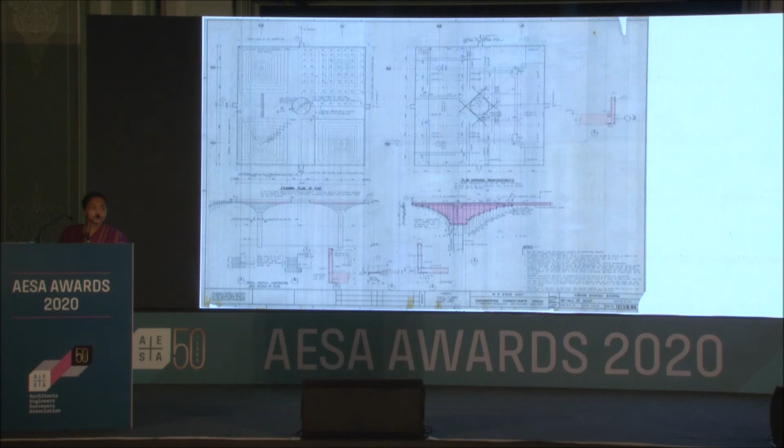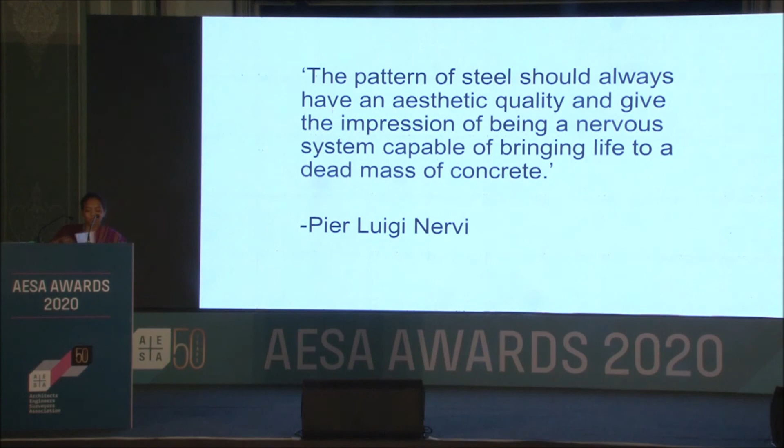Oh, sorry, I'm so sorry. This is the double curved shell of the multi-purpose hall. And these are the columns at the main foyers at the Vidhan Sabha, which are 30-meter by 30-meter spaces supported on just 4 columns, which are these. So as Nervi said, the pattern of steel should always have an aesthetic quality and give the impression of being a nervous system capable of bringing life to a dead mass of concrete. And we see Mr. Raj's drawings really show this so beautifully.

So I'll just wrap up by saying that the body of work of Mr. Raj really showcases the nuances of engineering and design and explorations in concrete as a new material to its possible limits, but also defying technological and material limitations within the country at that time. Almost all these projects shown in that era would also now be called modern heritage, and we're hoping that the word modern heritage gains more prominence in everyday language so that we don't lose many more buildings like the Hall of Nations.

I want to sum up by saying that the innovation in process and technique of Mr. Raj's work really marks a crucial time in history. The structural drawings of his projects are historic documents and hold the key to many hidden processes and secrets of the structures he created. In addition to being pieces of art, they are also packed with information and instructions and infinite details, revealing how tightly he controlled the building process as part of his design. And again, to quote Mark Jassenberg, his gift was to bring to every project the magic of engineering.

And I'd like to just stop with that, just to think about this magical world that he could create with such a functional, practical, and precise method of engineering. I think that's what we want to celebrate.

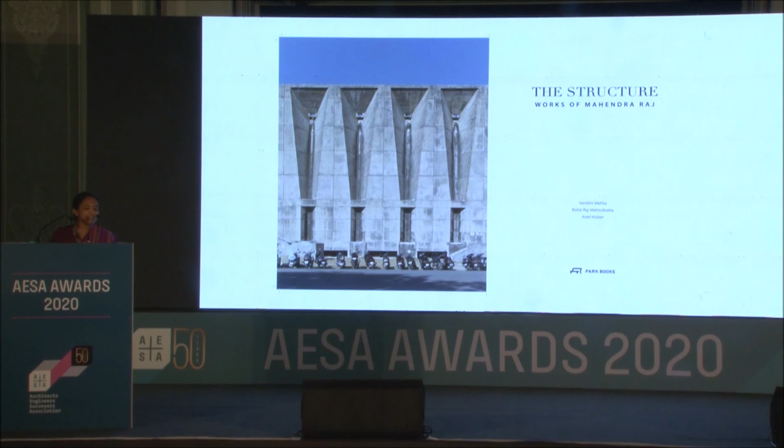And we really want to thank AESA for inviting Mr. Raj. With his message, he was very glad that there's an association which is so long-standing, bringing together engineers and architects and other disciplines and surveyors. And so I hope this can multiply in forms all over the world, because this is required so that it doesn't become only about the masters of architecture, but about the team that built the buildings, everyone to their due credit.